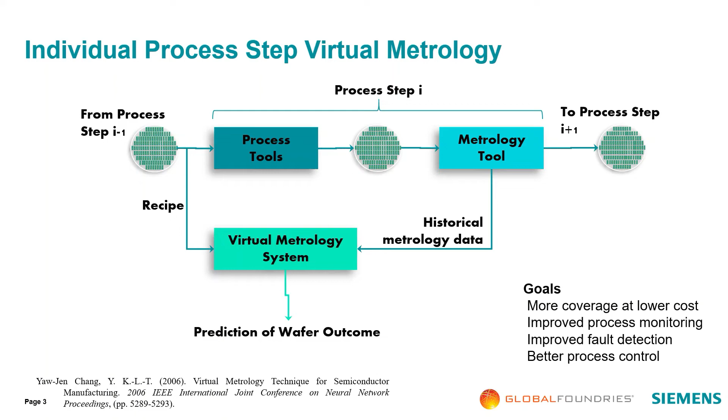An overall process virtual metrology, not only for one individual step, but for a concatenation of different processes involved. This means collecting all of the process data and feeding it into the virtual metrology system, using information about wafer acceptance tests that can be used to consider an acceptance criterion, and also considering inter-process steps.

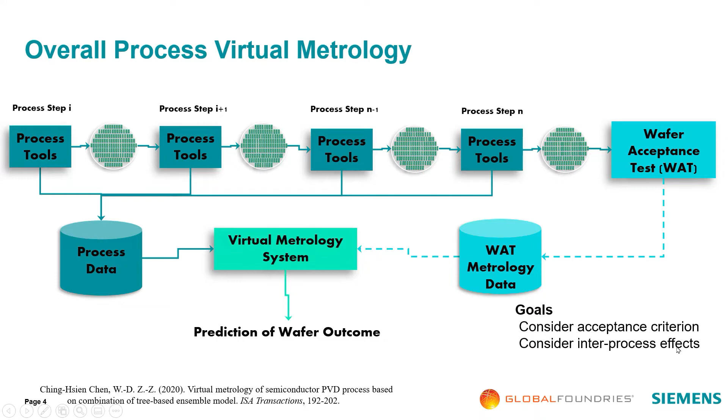Virtual cross metrology is the idea that in addition to the process information, every process step has metrology used for inline characterization of the system. The idea is that not only the process information is fed into the virtual metrology system, but also all of the signals related to the metrology data can be incorporated. This allows prediction of the wafer outcome at any position or point in the process, while also incorporating the product information, and we will see why the product information is necessary.

The goal of this approach is to improve accuracy and also improve interpretability. Interpretability is important from the point of view of identifying the locations in the process where the biggest payback of making a change would result.

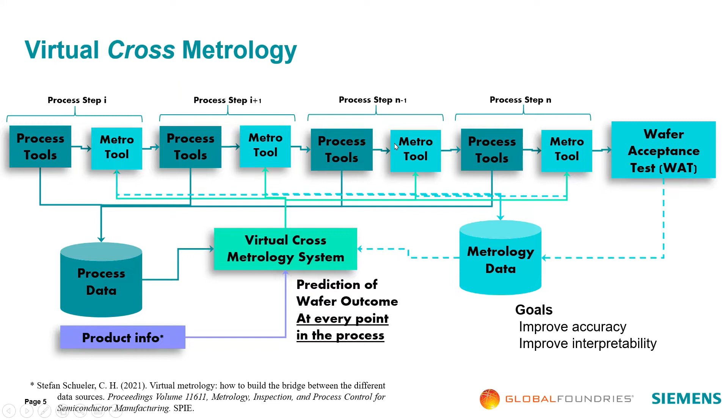How can we learn from other designs? The idea is that we extract design information from different designs, here indicated as rows: design 1, design 2, design 3, design 4. Each one of these different views of the design can be extracted as parameters or components 1, 2, 3, 4, 5, all the way to 7, providing different design features that allow us to look at the relationship that exists between those design features and their response to a specific process and metrology steps.

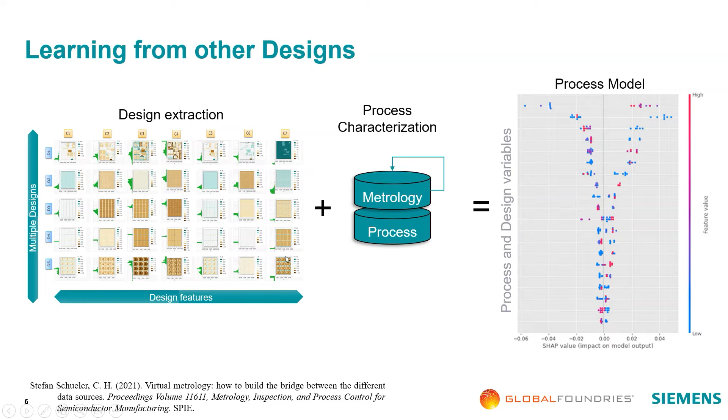The idea is that by combining all of these different parameters, we are able to generate a process model that tells us the relative importance of each one of the different metrology, process, or design parameters into the system. What we want to do is learn from other metrology measurements.

As explained before, one of the things we want to do is have full coverage over all of the different metrology measurements that we are going to collect. Today that is impossible because it's very expensive, and therefore we need to have this incomplete representation of the manufacturing of our devices, which makes it very difficult to align the behavior of the different process steps.

The idea of cross-metrology is to fill in the gaps of every single measurement, of every kind of measurement across the full stack of the design, so that we can actually identify the relative contributions that each individual process step provides to the final result.

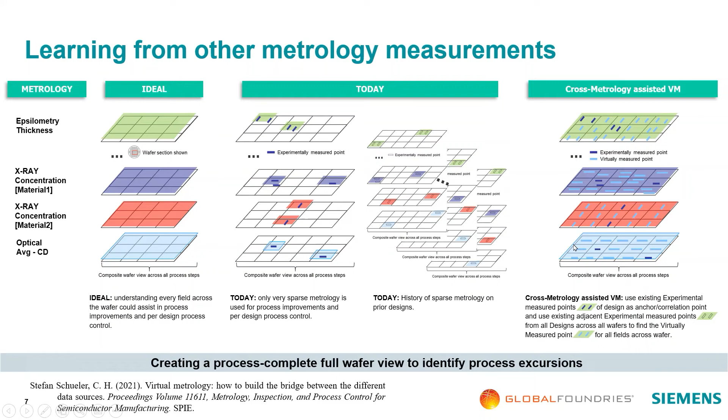From the point of view of virtual cross-metrology, we are going to compare two different scenarios in order to have a better idea of the level of interpretability that we can get with these different results. We are going to have an intra approach and an inter approach.

The intra approach basically means that only the information of the metrology parameters extracted in that particular process step are the ones being used. However, the full history of the process information is also carried around.

What we can also do is not only carry the information from the process, but also the information about all of the different metrology steps. Different measurements are taken in different locations, so in order to carry that information, models have to be generated so that they are able to complete the full stack over all of the different process parameters that have occurred before the final measurement.

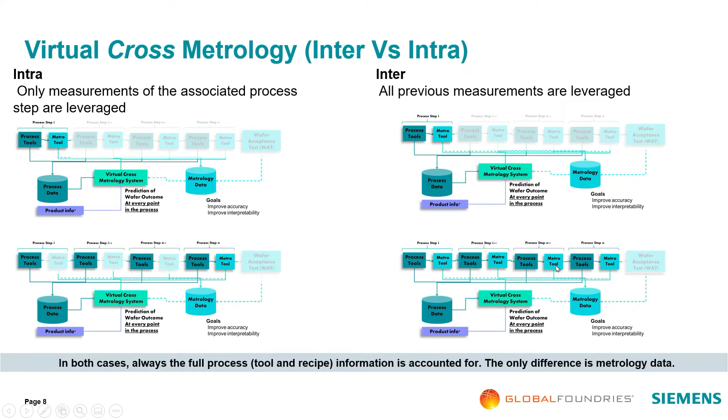That's really the difference between inter and intra. In both cases, they contain all of the process information, but only in the inter approach is information from previous metrology steps of previous process steps incorporated in order to achieve a better result from the final metrology tool.

This is an example of how we present the data between the model calibration and normalizing, or model training and normalizing, to the process range. In these pictures we have a calibration set, a test set, and a combination of the two.

On the y-axis is the target experimental result versus the simulated. We use 80% of the data for training and 20% of the data for validation and test. The results we report are the root mean square error and the mean absolute error, expressed as percentages of the process range.

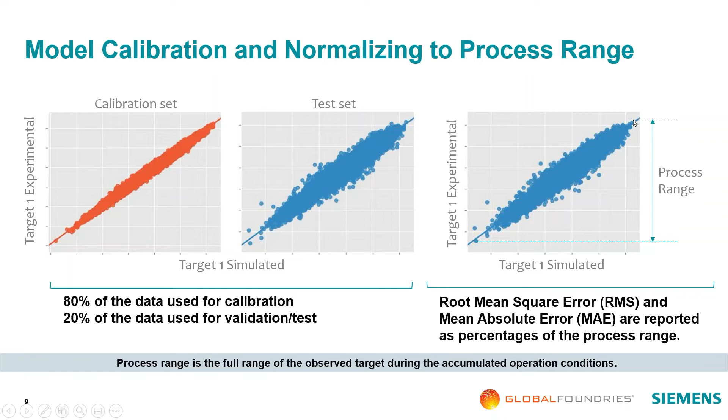The process range is the full range of the observed target during the accumulated operation conditions. That's what we take into account in order to only consider not a predetermined range, but a range that was observed during operation. This is a table that shows intra versus inter virtual cross metrology results.

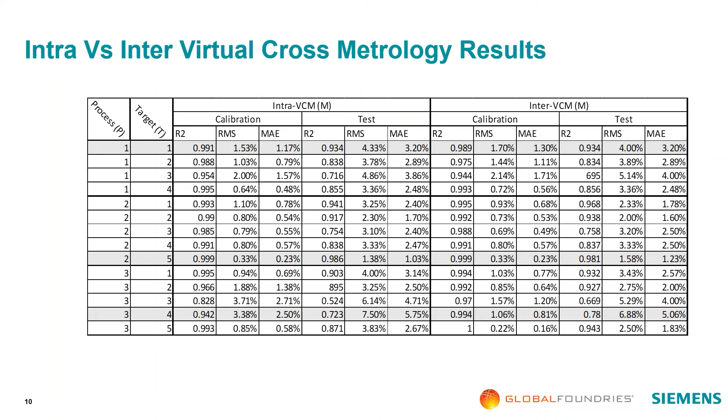The real issue is about how we can actually interpret the results from the point of view of machine learning. Can we learn something about the process that will allow us to be more productive?

We are going to describe a bit of the model inputs. We have these design parameters, labeled as design parameter. This is the product characteristics describing individual products—it is not categorical, it's information extracted from different designs in order to get the proper parameter.

Metrology is going to be indicated as process I target J, and it's a label that indicates a measurement J made in process step I. So this is the type of label that we are going to see in the rest of the results.

We are also going to have, from the point of view of hardware, what is either a tool state, a process parameter, or a tool ID. These are the different classes of parameters that we are going to be able to see.

By virtue of cross metrology, the targets are represented as process I, target J. This is important to keep in mind when we take a look at the different results.

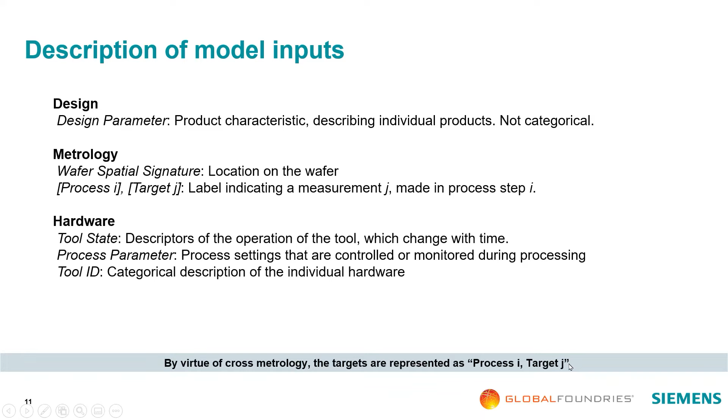Let's take a look at the first example, when the target is for our first process, the first target that we were selecting. And again, this is a case in which we get results that are similar in both cases. In both cases, for intra-VCM and inter-VCM, we can actually see that the relative order of the importance of these different parameters is very similar between the two.

We have a wafer spatial signature 1, tool state parameter 1, design parameter 2, wafer spatial signature 2. So there are slight differences between the two models, but the relative organization of the data and the importance of those parameters is similar between the two approaches.

And again, this was something to be expected because, as we said before, in this particular case for process 1 and target 1, there is no prior information. So in both cases, it's exactly the same thing.

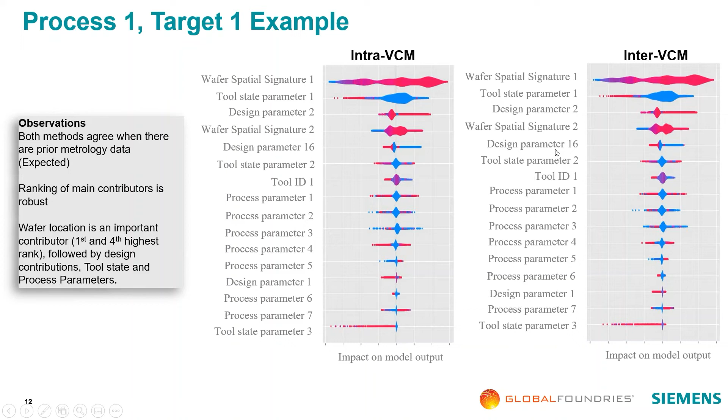So even though all of these models were calibrated with slightly different data sets and approaches and random seeds, they are basically all converging to a very, very similar answer. So it gives us a high level of confidence that the training process is done properly.

Now, let's take a look at process 2, target 5. If you remember, this is the case in which the intra-VCM approach seemed to have a slightly better improvement in accuracy with respect to the inter-VCM approach.

However, this is when we start looking at the differences. We take a look at the very first one, which is this wafer spatial signature one. This is something that is telling us about the wafer fingerprinting that is happening for that particular step.

But when we take a look at the second step, we see that we have process 1, target 1. What does that mean? It means that from the point of view of inter-VCM, when all of the information has been provided, it's able to recognize that this particular target of a process ago, process 1 — we are already here in process 2.

So from a previous process, from an I-1 process, it's the one that is dictating a higher contribution to the final result. That's why it's listed here in the second step.

Why is this really important? It's really important because in the absence of that particular variable, basically there is no information about how some of the other parameters or other process steps are affecting the current process step.

Basically, all of the information is simply considered as tool state parameters and so on. It doesn't really give us a good indication of what is the relative contribution of that particular process to the next process. And what that unfortunately can lead to is that if we're only focusing on accuracy, we will say...

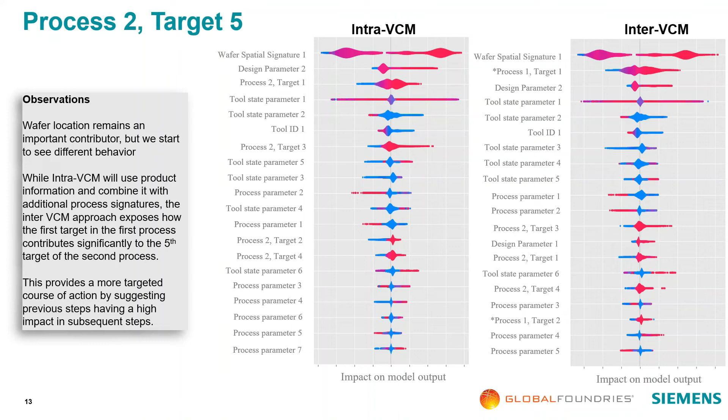Is this something that is not repeatable? Well, let's take a look at process 3, target 4.

This was the case in which even the accuracy seemed to be better for the inter-VCM approach than the intra-VCM approach. Now we are 3 processes deep.

Now, as we can see here in this particular case, again, basically that process 3, target 3 — this is one of the other measurements that are taken for that particular process step. It's telling us that there is a very, very strong relationship between target 3 and target 4.

Because basically what this says is that knowing target 3, we know the relative importance of that particular target into the target 4 that we were trying to model.

But when we take a look at the previous steps, now we have all of the different targets for process 2 and process 1, we can actually see that for this particular measurement, for target 4 in process 3, we have a very good understanding of what is going to be the final outcome very early in the process.

Process 1, target 4 already identifies a very strong dependency of that parameter, basically in 2 process steps, on what is going to be the final result, the relative importance, followed by process 2, target 4, which again is a process that happens before this one but has a very strong sensitivity. Then process 1, target 3. So this is telling us that the top 3 contributions, once we are deeper into the process, actually come from previous process steps.

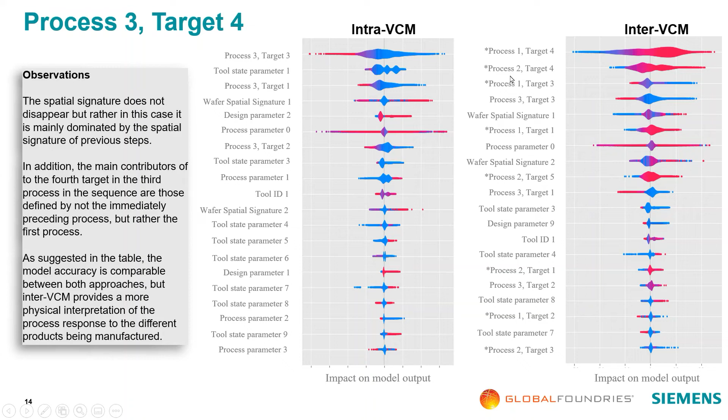So in conclusion and future work, we define this intra-VCM approach as a method in which only measurements of the same process step are combined to reinforce each other. And we define an inter-VCM approach in which measurements of present and past process steps are incorporated to better characterize the full process sequence. These results suggest that if we just look at model accuracy, it can be misleading.

Because, given the large number of degrees of freedom and the tight control of the process parameters, the model may result in overemphasizing the actual behavior of a particular process. However, the inter-VCM approach delivers a physical interpretation and characterization in which prior process steps, when properly characterized, can be the main drivers in making a more accurate prediction that otherwise would be assumed to be random, when in reality they are systematic and predictable.

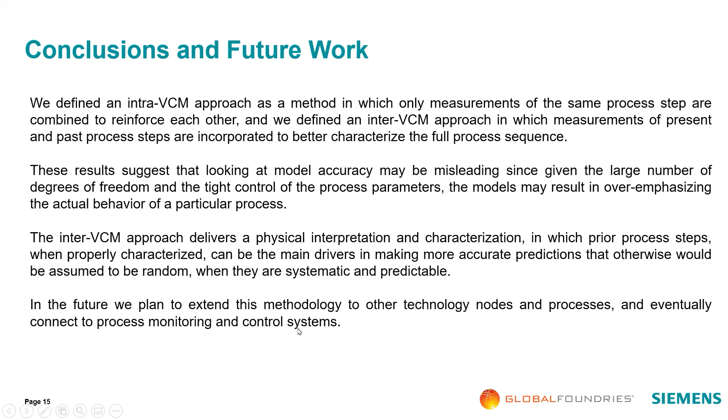In the future, we plan to extend this methodology to other technology nodes and processes, and eventually connect to process monitoring and control systems.

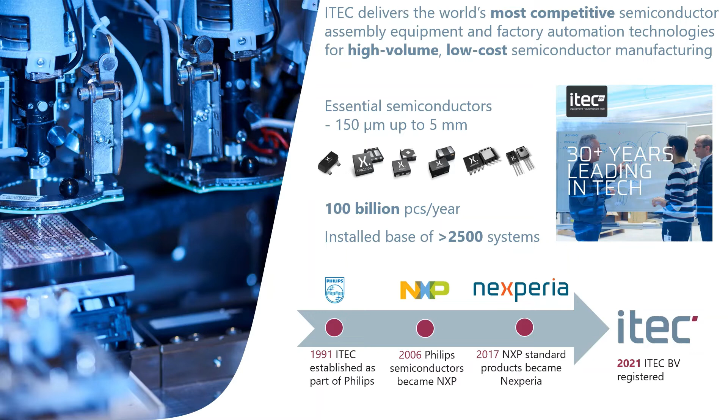ITEC delivers the world's most competitive semiconductor assembly equipment and factory automation technologies for high volume, low cost semiconductor manufacturing. For over 30 plus years, we have been supplying equipment internally to NXP and Nexperia, producing over 100 billion products per year with an installed base of over 2,500 systems.

The first class of systems in our portfolio are the die bonder and die sorter equipment. We manufacture machines which operate at speeds up to 72,000 units per hour, with an accuracy of plus or minus 5 micron 1 sigma. And we offer the lowest integral cost for assembly solutions.

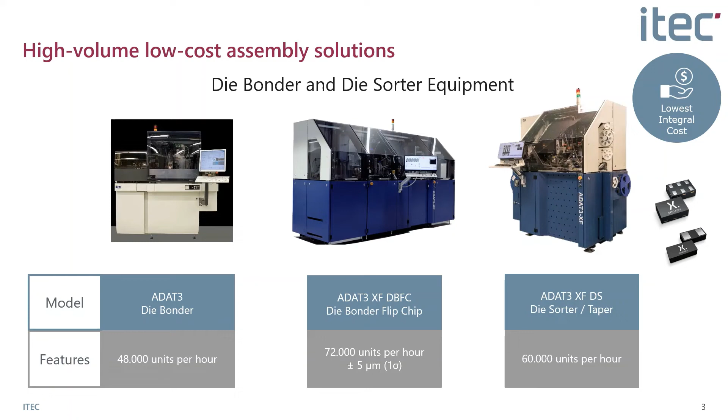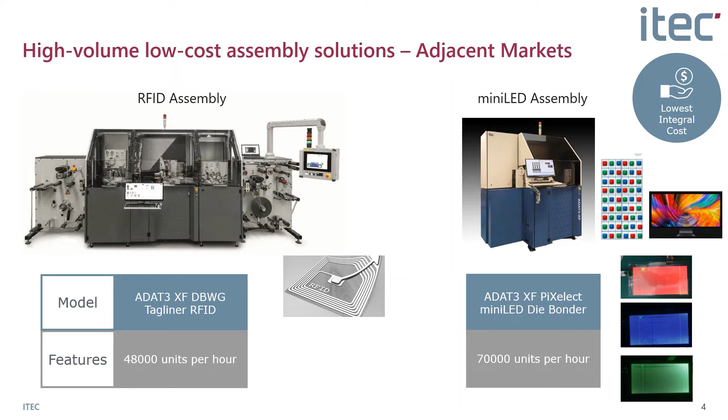We also offer, from last year, assembly solutions for RFID assembly and mini LED assembly. We also have tester and in-tape inspection equipment. You can see the tester speeds are up to 92,000 units per hour, and our in-tape inspection equipment speeds are up to 140,000 units per hour.

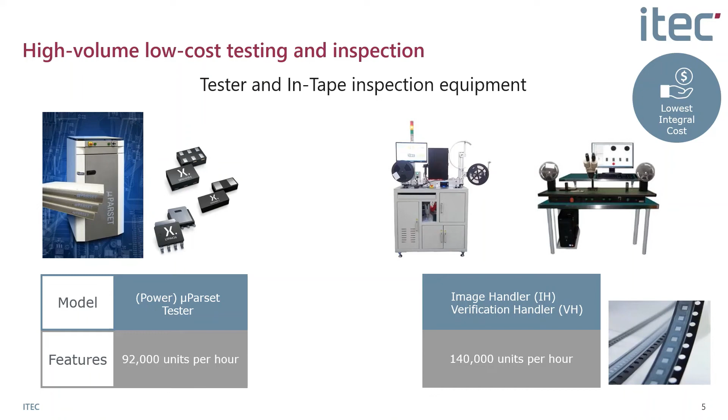We also offer smart manufacturing solutions for the factory production line, leading in Industry 4.0 for mass production. We offer functionalities like full die level traceability, big data analytics, and so on. Currently we have over 3,700 of such tools connected, which allows for closed loop factory control.

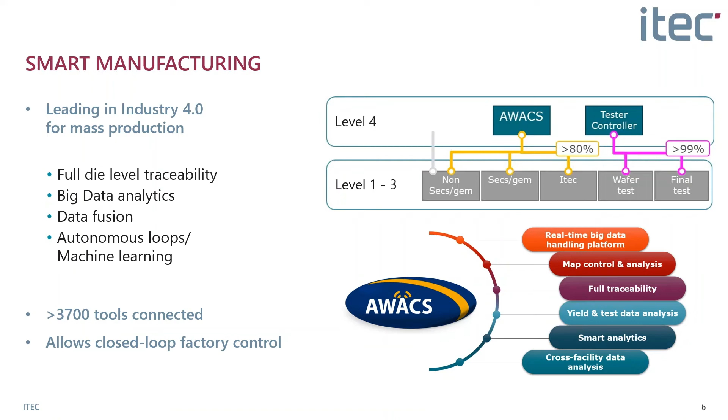Coming back to the IMOCO project, IMOCO is an ECSEL joint undertaking project which started on 1st September 2021. It's not been that long now, and there are around 46 partners from 13 countries collaborating on this project. If you want to connect with us, please follow us on LinkedIn and Twitter, and you could also visit our website.

IMOCO stands for Intelligent Motion Control under Industry 4.E. In case you are wondering what Industry 4.E is, it's a lighthouse initiative concept introduced by ECSEL JU to signpost specific subjects of common European interest. It pulls together the work that is core to the digitalization of industry.

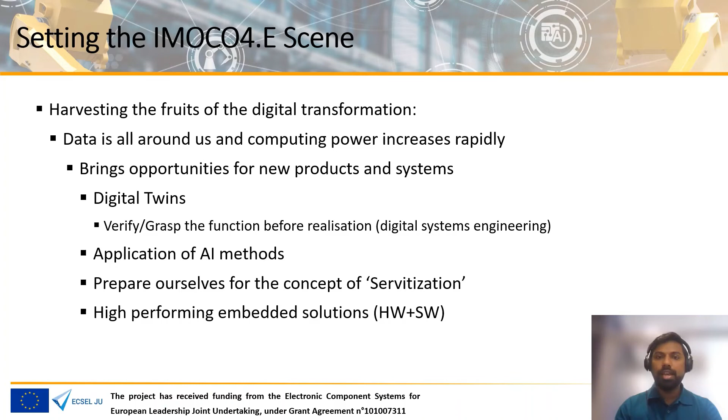In IMOCO, we try to harvest the fruits of this digital transformation. Data is all around us and it's really cheap, and the computing power is also increasing rapidly. This brings opportunities for new products and systems that can integrate digital twins, AI methods, servitization, and high-performance embedded solutions. So let's look at why we need this digital transformation, for whom this is applicable, and how we are going to achieve this.

The market is pushing machine performance to its physical limits. To improve, you have to know more about the system behavior. You want to visualize, understand, and master system dynamics. Digital transformation also starts with generating the right data, and you need to analyze the data and look for correlations in order to realize less downtime, fewer rejects, higher output, and more efficient operation of the machine, etc.

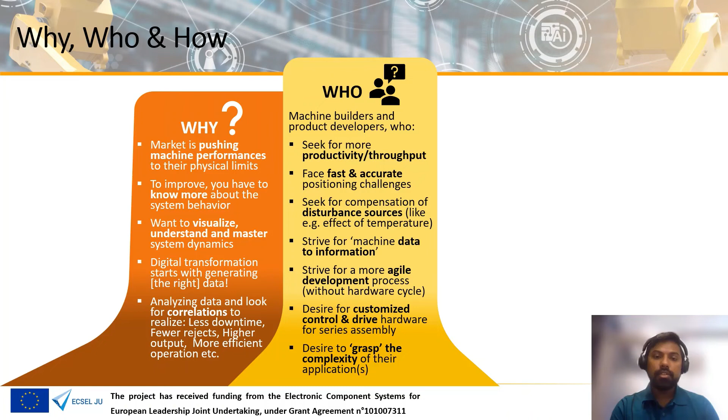This is applicable for machine builders and product developers who seek more productivity or throughput, who face fast and accurate positioning challenges, who seek compensation of disturbance sources, who strive for machine data to information, who strive for a more agile development process, who desire customized control and drive hardware, and who desire to grasp the complexity of their applications.

In IMOCO, we achieve this by defining fundamental building blocks, architecture layers, pilots, demos, use cases, and work packages. We will realize the IMOCO reference framework for building intelligent motion control systems.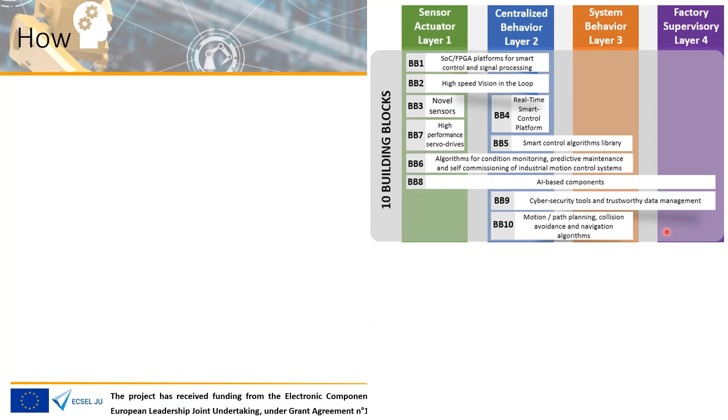These building blocks would be first validated and then realized or integrated with 5 pilots and 4 demos. The pilots are, let's say, the industrial use cases, or industrial production lines. For example, pilot 1 is on 3D printing, pilot 2 on semiconductor production, pilot 3 on high-speed packaging, pilot 4 on healthcare, and pilot 5 on mining or tunneling.

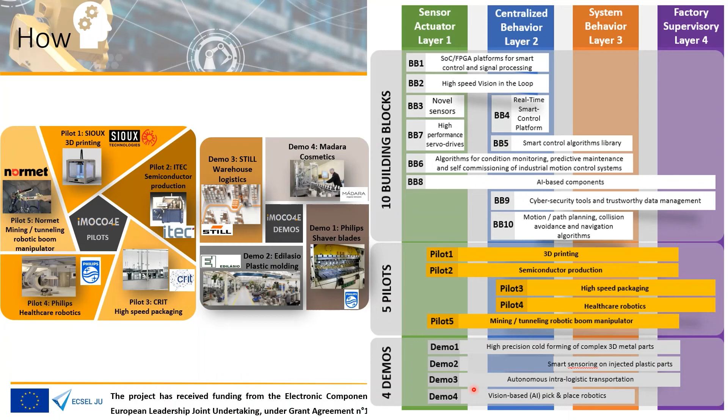And we also have 4 demos on high precision cold forming, smart sensoring, autonomous intralogistic transportation, and also on vision-based AI and AI pick and place robotics. So the building blocks would also be validated on these use cases.

So we have 4 use cases: a use case on industrial drive for smart mechatronics applications using a lift, a use case on CNC for integrated machine tool and robot control, tactile robot teleoperation, and advanced and intuitive robot control and programming control. So all these pilots, demos, and use cases have industrial relevance.

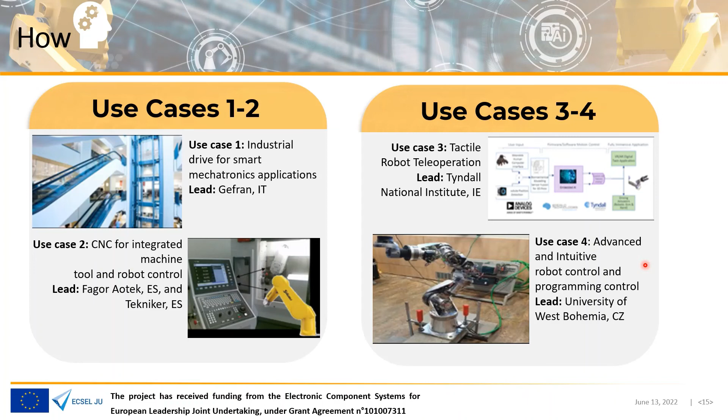This slide shows some benefits of the expected results per case, and here you can see key performance indicators or parameters that we use to evaluate the Imoco project. And we aim to achieve, for example, 50% testing time reduction by using digital twins for pilot 5, and up to 50% reduction of commissioning service or time of new modules to market. You could also see other performance indicators here.

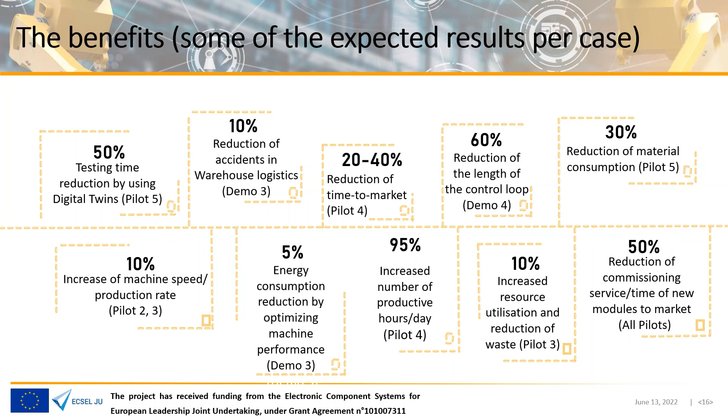So what is the big technical picture in the Imoco project? In Imoco, we have 8 work packages defined. Work package 1 and work package 8 are for project management and dissemination, so not so technical. But the other work packages, for example, work package 2 brings the system engineering view, which is the first step in the Imoco framework development, and it will define how the building blocks could click.

Work packages 3, 4, and 5 will bring the contents that are mapped onto reference architecture, and work package 6 will bring the validation results of building blocks, and work package 7 will bring the integration results of building blocks in pilots and demonstrators. So how can you benefit from this Imoco project?

As I already told you, the Imoco project started only on the 1st of September 2021, so it's still an ongoing project, but the project is also a successor to a previous project, which is the I-MECH project. So this video will give you a hint of what you can expect from the Imoco project.

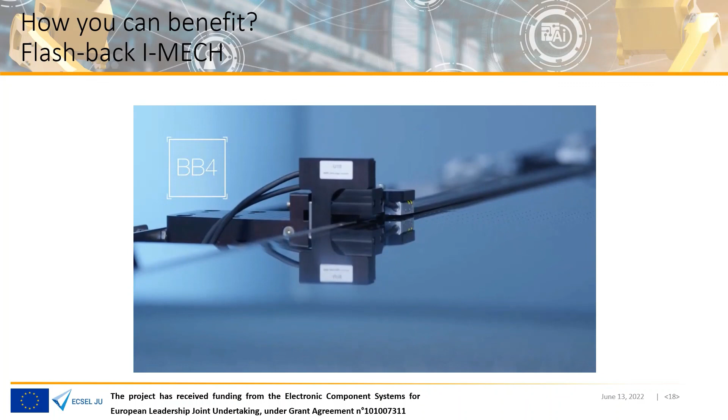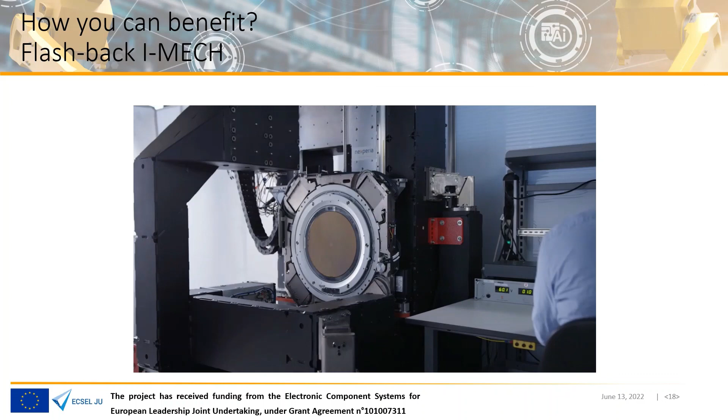So in the video, you saw how building blocks in the I-MECH project were integrated into actual industrial systems. And SAXCS, shown in this slide, is the final product or final reference framework that was the outcome of the I-MECH project. In the Imoco project as well, we aim to achieve something similar.

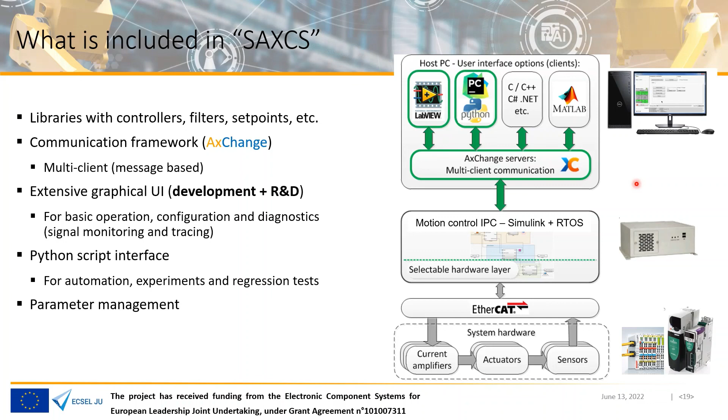For example, a library with controllers, a communication framework, an extensive graphical UI, and parameter management. So a generic framework which can be used for intelligent motion control system development and integration. It's not just the implementation of the actual system. SAXCS also provides lifecycle management, so it's both the system implementation plus how to manage the lifecycle of those systems.

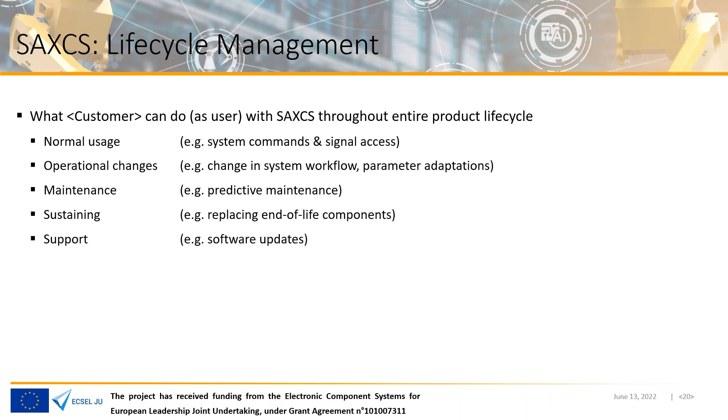So in conclusion, how can you benefit from the IMOCO4.E project? In IMOCO4.E, we would provide a reference framework for edge to cloud intelligence, and the intelligent motion control systems will be smarter, faster, resilient, highly accurate, highly reliable, and highly configurable. And thank you for your patient listening.